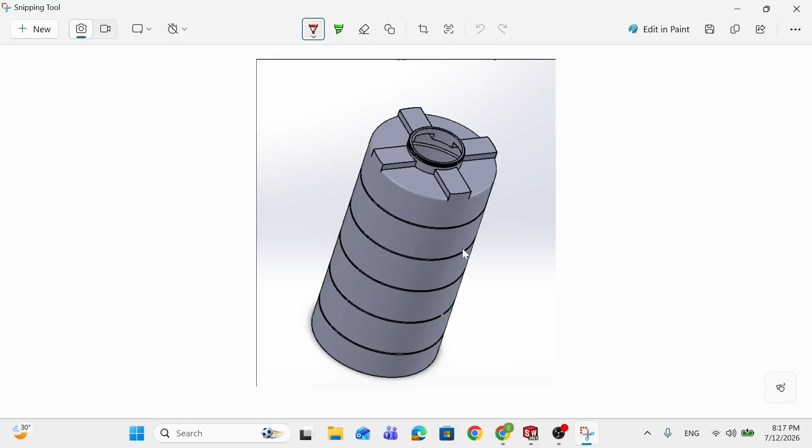Welcome to SolidCore. In this video, we are going to explain several of the most important commands in SolidWorks while drawing this water tank.

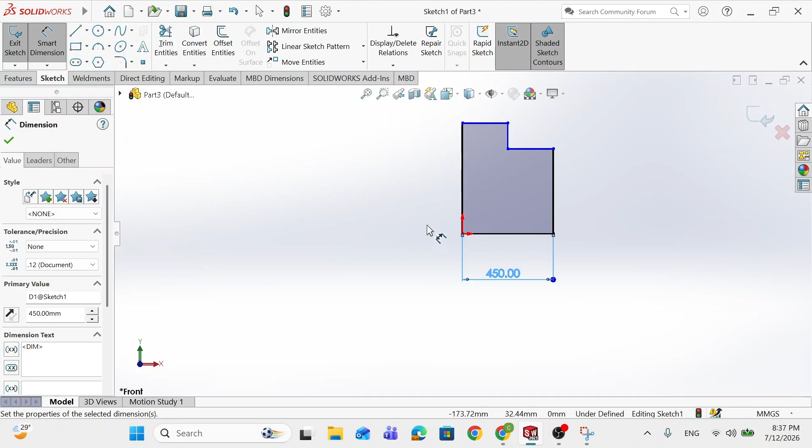Instead of drawing a circle and applying an extrude to make a cylinder, we can start from front view, sketch half of the cylinder profile with the opening at the top, and then set the dimensions. We have 900 mm in diameter, so we will set our sketch to 450 mm from the origin point. After the revolution about this axis, this will give a full 900 mm diameter. The total height is 2 meters, with the opening at the top being half a meter, so we will set 250 mm. And we have 100 mm as a flange height.

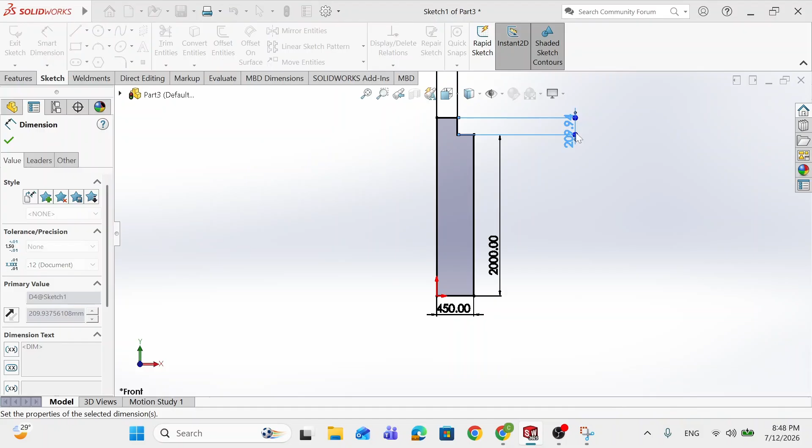Now go to the Features tab and select Revolved. In the Axis of Revolution box, choose this line to make the sketch revolve about it. Now we have a fully defined sketch.

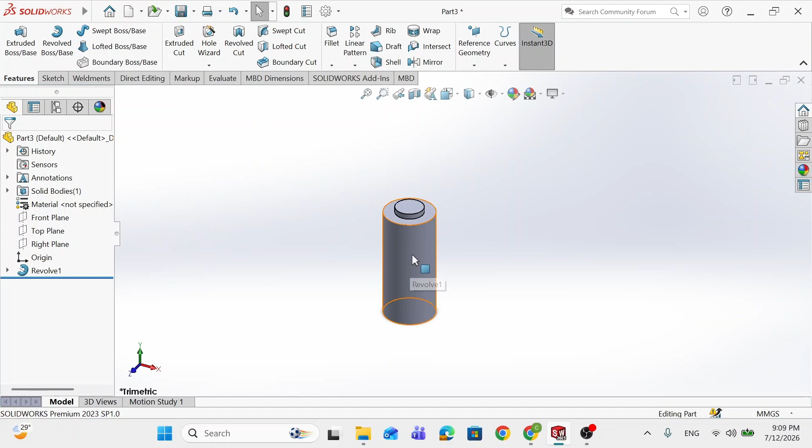Now to make the tank look more aesthetic and add the necessary structural strength to resist hydrostatic forces, we need to add the beading lines. Switch to front plane and draw a circle tangent to the cylinder's wall. Set its diameter and define its position 300 mm to the base.

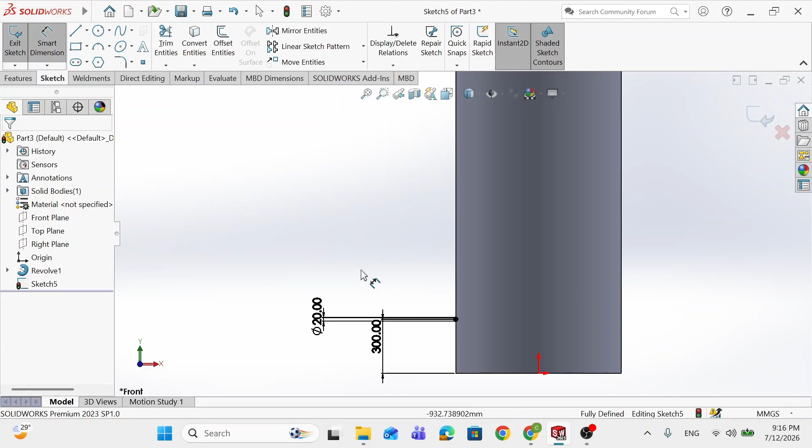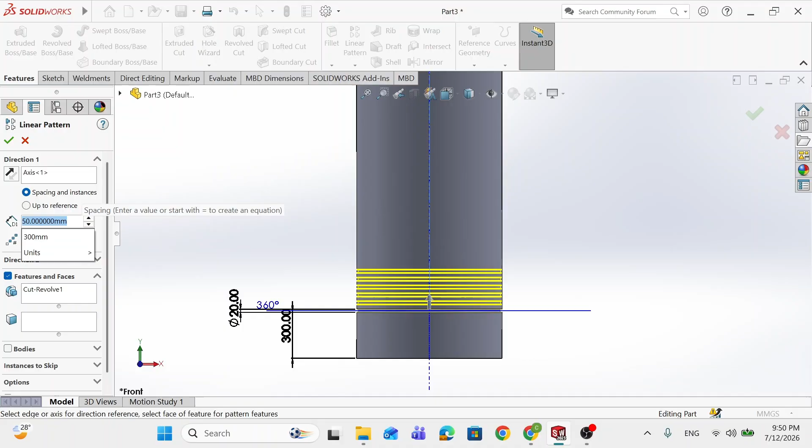Now from Features, go to Revolved Cut to revolve the fully defined sketch about the center line. Instead of repeating these steps for the entire tank, simply we can use linear pattern from the Features tab. In the Features and Faces box, choose our beading line. For direction 1, choose the vertical center line to define the axis of the pattern. Now set the distance between the beading line and specify the total number you need. It's that easy.

Now to model these structural ribs, start sketching on the top surface. Use the Convert Entities tool and select your two existing circles to project them onto your current sketch. Next, draw a rectangle that consists of these circles.

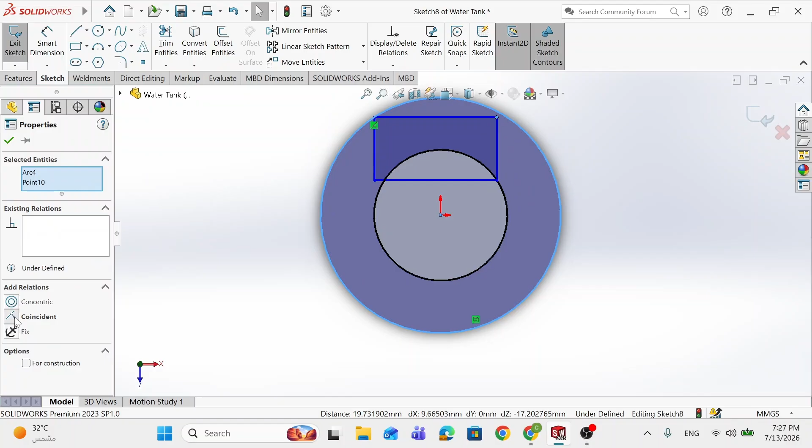Trim the additional parts to get a fully defined sketch. Set the distance between the two lines and the line with the origin points.

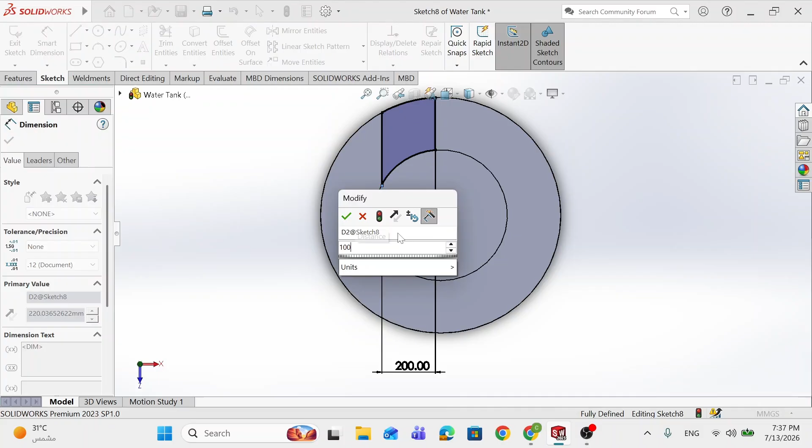Now from Features, select Extrude, set your desired thickness and hit OK. As expected, we won't repeat these steps manually to create the remaining ribs.

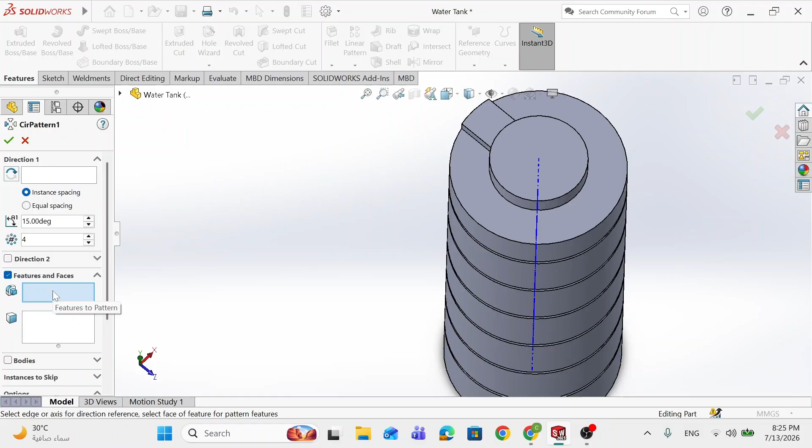We will use the circular pattern command instead. Go to the Features and select Circular Pattern. In the Features and Faces box, choose the rib body you want to pattern. In Direction 1 box, select the tank body or the center line. Here you have two key options.

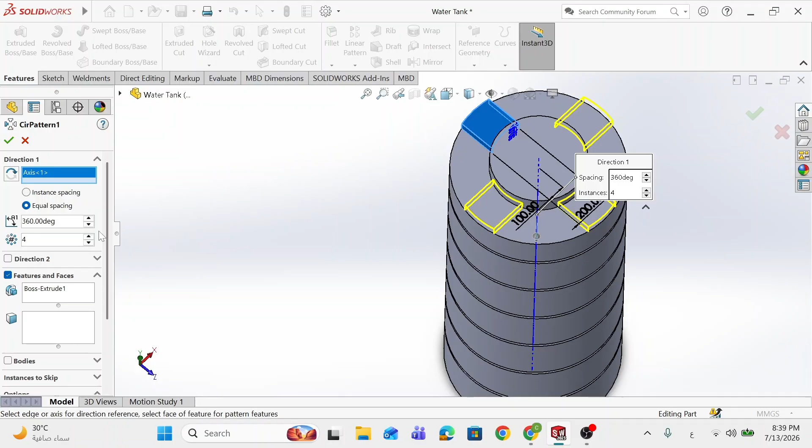Instance spacing allows you to set the number of degrees between each pattern, in this direction or the opposite. Equal spacing automatically divides your chosen degrees between the number of patterns. Choose the one that fits your design best. And you are all set.

Now that we have finished the outer details, let's activate the section view to inspect the interior. As you can see, the body is currently solid. To make it hollow, we will use the shell command.

In the Property Manager, set your desired wall thickness. Select the top face you want to remove in the Faces to Remove box. A common mistake here is thinking you have to fill in every single box. If a box doesn't apply to your design, just leave it blank. For example, here we just need to remove the top face.

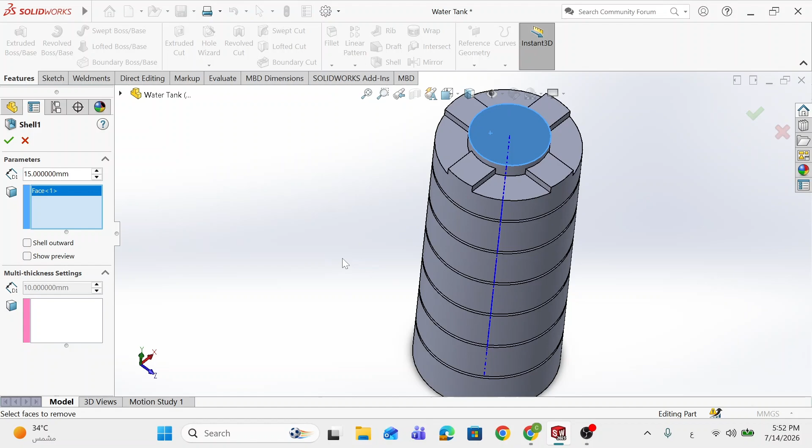Now, if you need to adjust the thickness of specific walls, like making the base thicker than the sides, use the multi-thickness settings box. Select the base and set your new value.

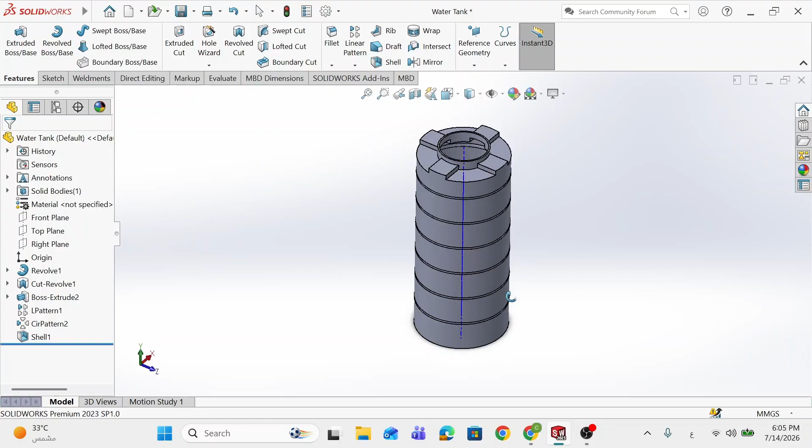Now, before we finalize everything, there's a critical rule. Always perform your shell command after you've finished all your external features, except for threads. Check this out. See how much the order of operations matters in your design tree. Watch what happens if I apply the fillet after the shell.

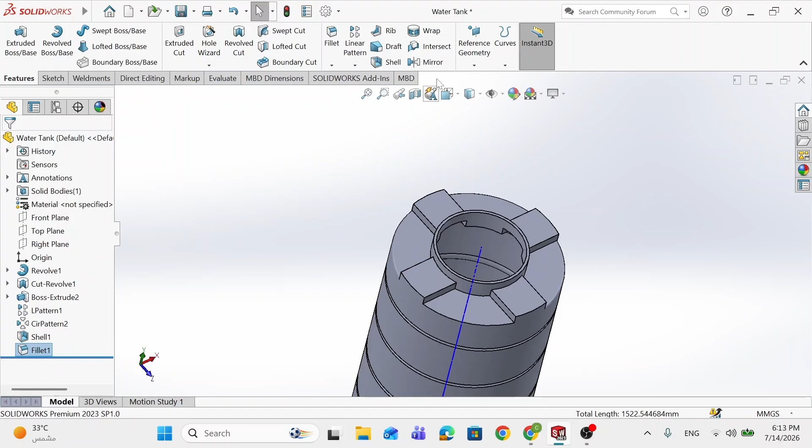We still have a sharp internal edge, because the shell was performed first and doesn't see the fillets.

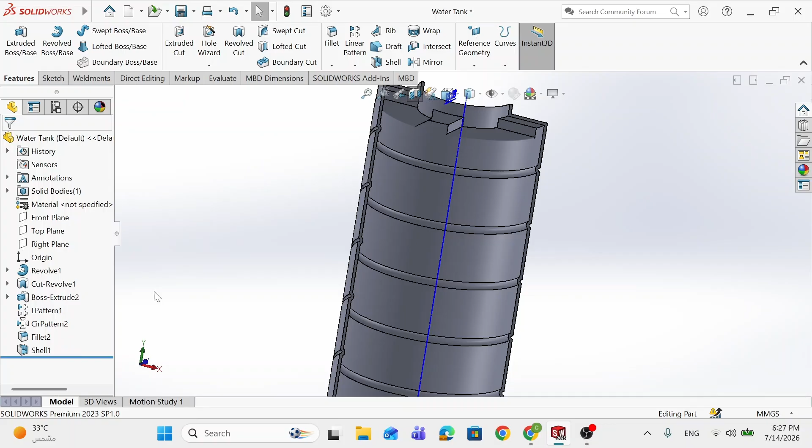But if I simply drag and drop the shell under the fillet feature in the design tree, now the shell sees the fillets, and it automatically creates a seamless, professional internal transition. So always keep your shell command near the bottom of your feature tree, just before your threads, to ensure the internal details are clean and correct.

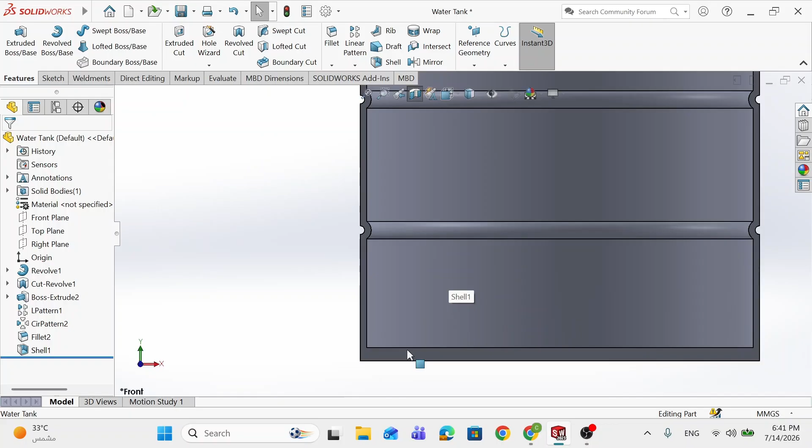You will notice the top is now open. The beading lines are perfectly formed, and you can clearly see the difference in thickness between the base and the tank walls.

Now let's create threads on the outer body of the entrance. From a manufacturing perspective, you always need to start with a chamfer on the edge. This makes the threading process much cleaner and smoother.

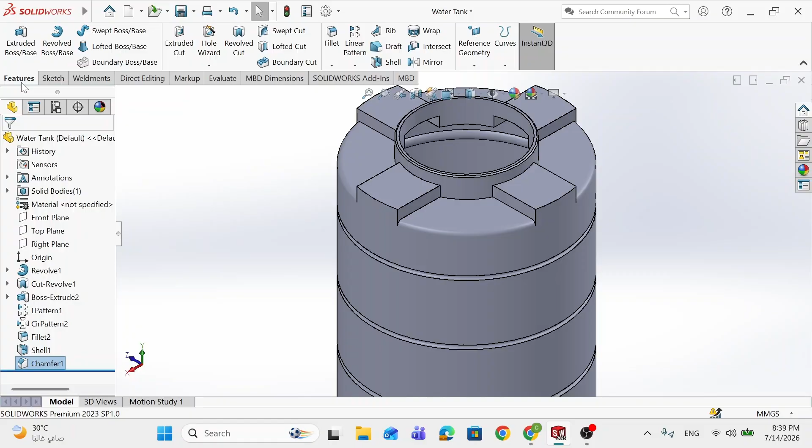Once the chamfer is ready, go to the Features tab and select the Thread command. Select the circular edge where you want the thread to start. You can define the length of the thread as blind or set a specific number of revolutions. Okay, let's take 10 mm as blind.

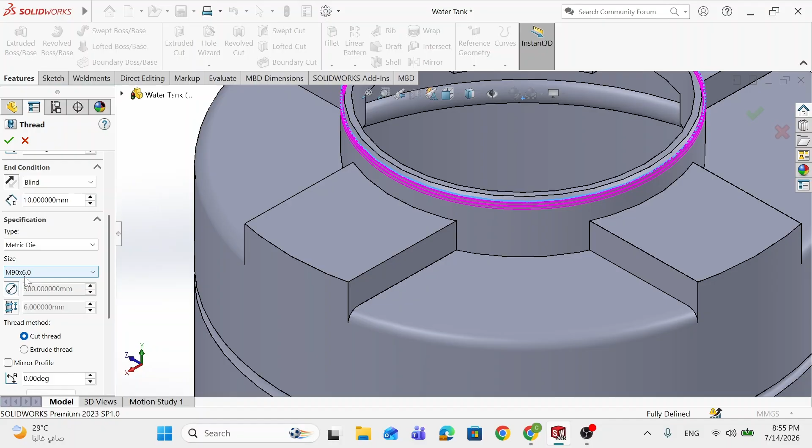Now let's look at the specification. You might wonder what these numbers mean. Capital M stands for metric units. The 90 is your nominal diameter. Note that in SolidWorks, even if you pick a standard size, the program will automatically adjust the thread to fit your specific diameter perfectly. The 6 is the pitch, the distance between each thread peak.

Okay, now we get the thread ready. But look here. The cover won't thread on properly because the thread starts exactly at the edge we selected.

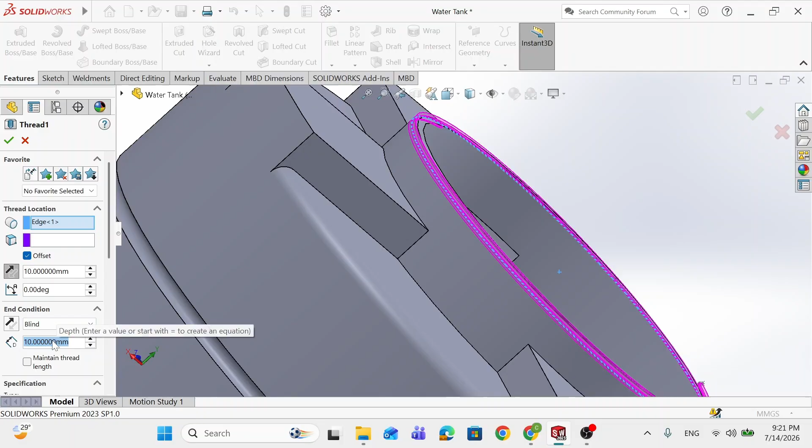To fix this, edit the thread feature in the design tree. Go to the offset option, set it to 10 mm, and make sure it's offset above the selected edge. As a rule of thumb, always add 10 mm to your required length to allow for this offset. Finally, go to thread options and always keep the trim options active to remove any additional unwanted threads.

Notice the thread after offset. And you are all set.